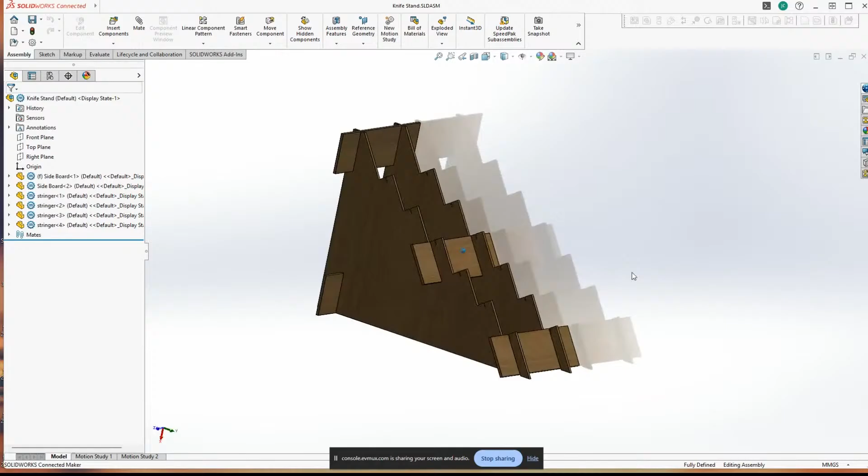So I think today what we're going to do is go over the knife stand, and I finished it up, at least this iteration of it. So I'm going to kind of go backwards through it, and this is the final version. Well, at least the final iteration of this. We may make changes. I'm going to have some made up and tested, and see what changes may need to be made or improvements.

But basically, it's just 3 millimeter basswood cut from a 12 by 12 sheet, all cut on a laser, so that when they are offered for sale, she'll offer engraving service. Also, there will be a base price for the stand. I'm not sure about the colors. I know that there are different colors. I don't know if she stains them or if they come in the wood, if she purchases it in different colors. But there will be a price for the stand, then there will be a price for each engraving

that you want. So if you wanted like the top, which is completely visible, even if all 6 knives were on here, the bottom front, you could do a logo there. And this is pretty tall, so a knife wouldn't cover up most of this, so you could have that engraved. This would be partially covered up if you had a knife on here. But either way, you could have them all engraved if you wanted, but it'll be a little extra for each engraving. You could have the sides engraved, I'm assuming.

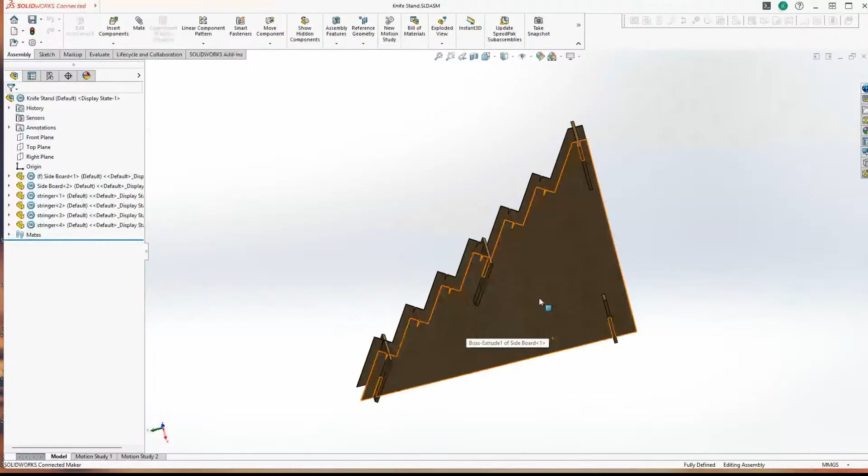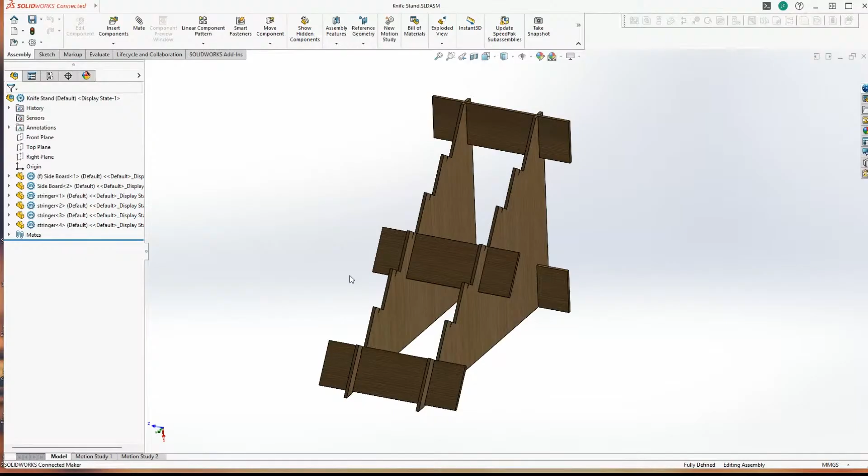But when you didn't have knives on it, everything would be visible. So if you were like displaying this at a flea market or a knife show or something, and you were selling the knives, it might empty up and expose places where you might want to have a logo. Anyway, that's up to you and the person who will be making and selling these.

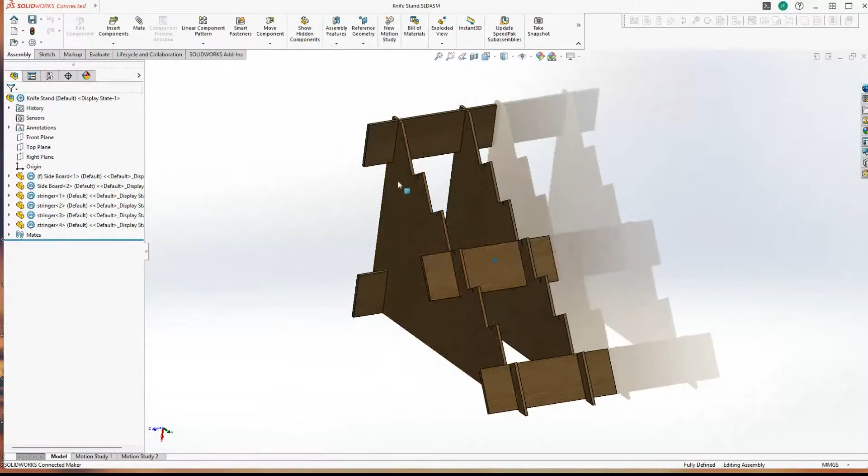Anyway, I wanted to go through a couple issues, or at least design strategy that I had when designing this. And I started with this side piece knowing that I wanted a step design that knives could lay on. I mean, we've all seen the 3D printed versions of this, which are nice, and most of them are more sturdy. This one is bigger than most of the ones I've seen, and it'll lay flat. It'll probably ship in a padded envelope, I'm assuming, or a thin box. Won't weigh much, and the cost will be pretty reasonable.

Let me open up the... This is where I started, and while designing it, I wanted to keep in mind. I knew I wanted to cut this out of a piece of 12 by 12, so I knew that I wanted this piece and the other side, the left hand and right hand sides, to fit together. So I had to make this length the same as this length, so they could be nested together, and that could be like one rectangle to cut that out.

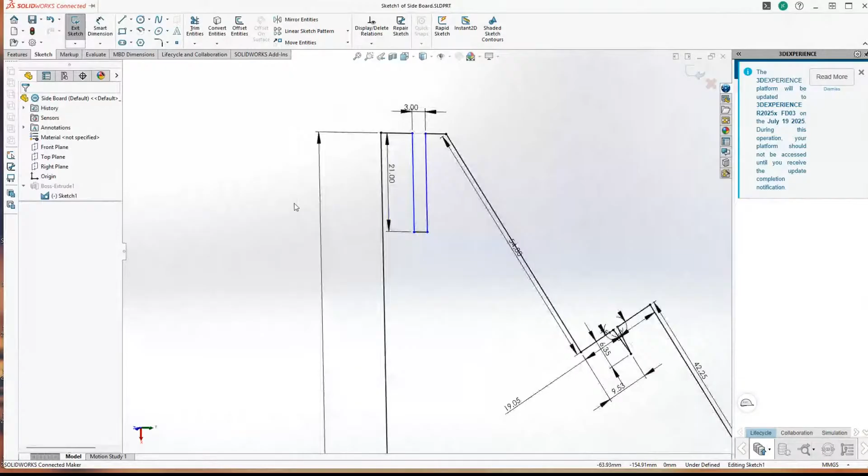These lengths changed because every little tweak you make changed. I put 6 shelves on here, so I had to tweak these a lot while I was going. So I had an idea, I sketched it up, then I just started tweaking. This is blue because it's not constrained, so I could move this, and we don't want that. So what we would want to do is add a dimension here just to lock this in so it wouldn't move. And now you see that it's all black, it's not blue. So this should be fully constrained or close to it. Yeah, I think everything, there's no more blue, so it's fully constrained.

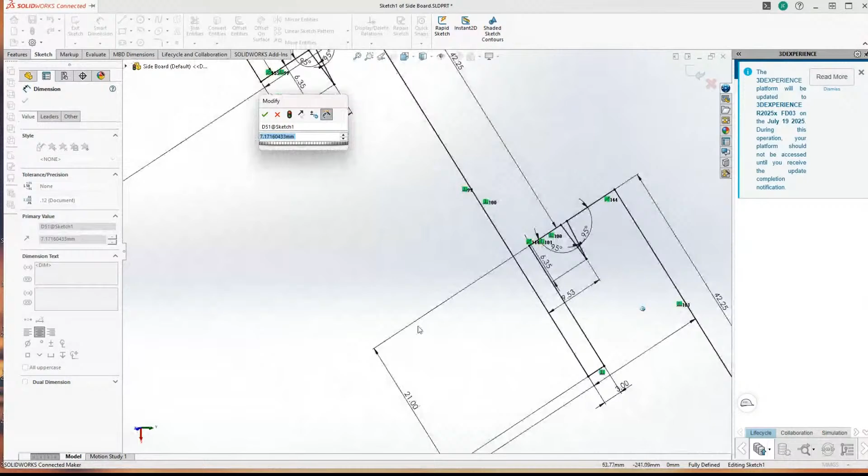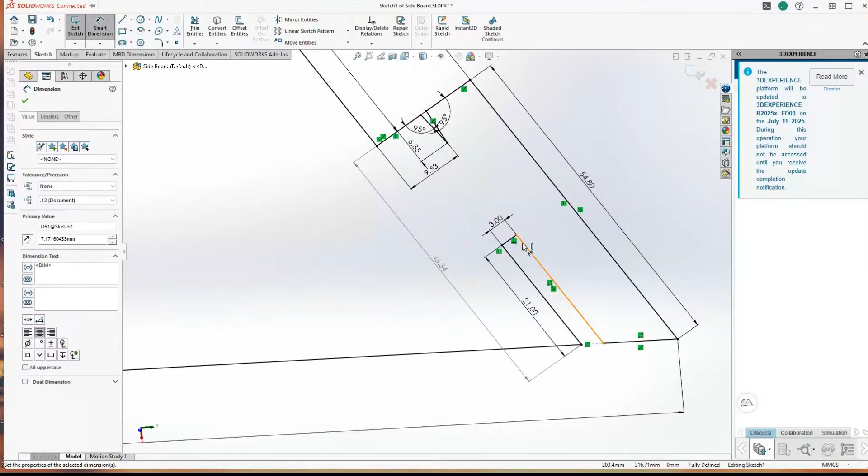Now, the methods that you use for constraining things all vary a little bit. So my primary job function was not creating mechanical parts, so there may be things that I'm not doing the way someone more experienced with mechanical assemblies and parts would do it. But this is what I got. So I knew that these had to be 3 millimeters because the material is 3 millimeters thick. And this could be adjusted slightly, you know, if the material wasn't consistent, you might want to make this a little tighter or a little looser based on how the material comes in.

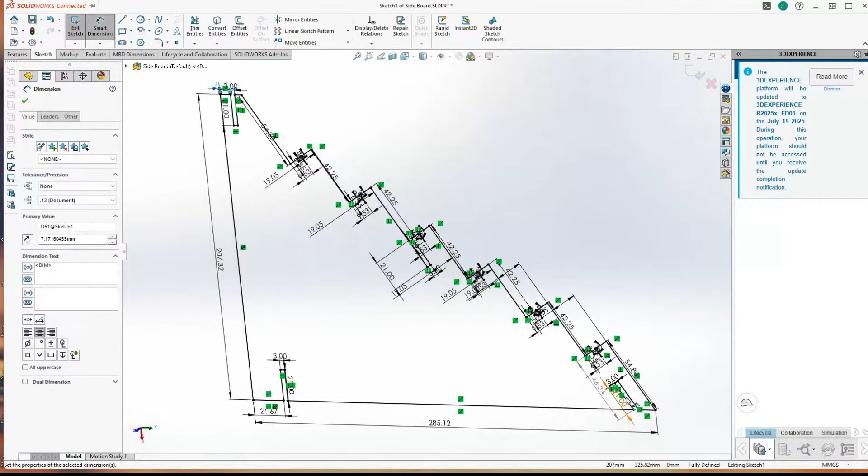But originally I just had a brace on top, on bottom, and the front. And the person that's making these for me suggested adding a brace in the center. I decided to put it on this same angle just so it looks, I think, if you put a logo on there or something, it would look better. So anyway, once that was done,

and I put them together, started tweaking, I made the side braces. I originally made these 6 inches long, knowing that out of that other pattern, you could get 2 of them cut on one board. Originally, though, let me show you the flat pattern that I created.

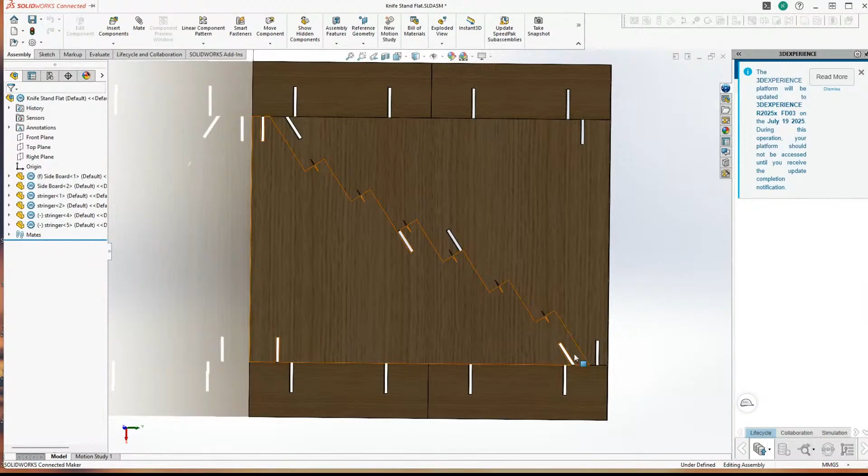And the way this was created, I had to rebuild that. I think it's because I added that dimension up here, so it wasn't locked in. Now it's locked in. So anyway, after I created all the parts, I just created this assembly by bringing in each part. So I brought 2 of these sides in, and then you use the move or the mate to mate them together. And actually, I guess we could walk through that process. Let me start a new one.

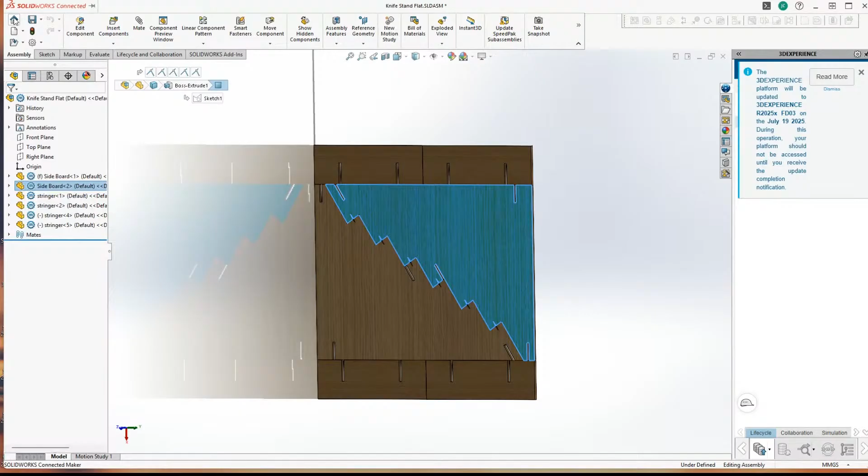New assembly. You want to insert component. Let's do a sideboard. Hit the check mark. That's inserted. Let's insert another one. Another sideboard. Oh, I don't know if that brought it in. Oh yeah, they're both here. So then you'll want to select one and rotate it.

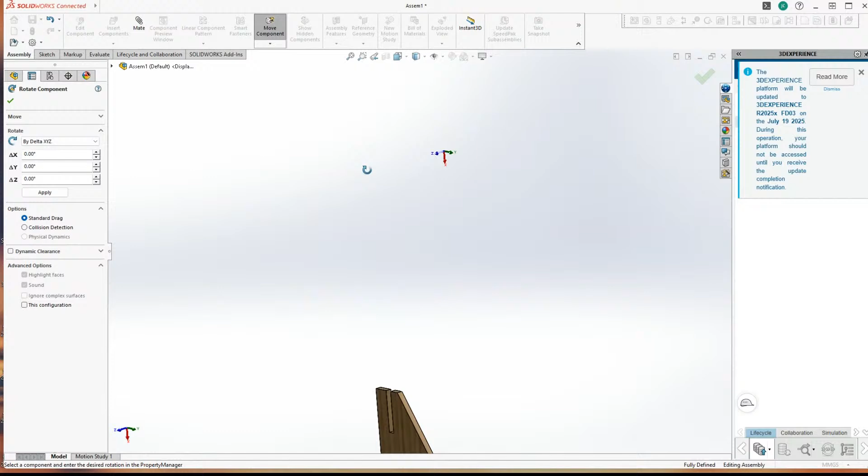And instead of a free drag, I'll do a rotation around an axis. And the Z axis is the one that I want to rotate on. And so I'll go over here and rotate it 180 degrees on the Z axis. Apply that. I didn't select the component. Selected component is fixed. I think the first one I brought in was fixed, so clear selections.

There are ways to select it. Oh, I should have selected it from the tree. So let's try this again. Move component, rotate about the Z 180. That didn't work. Let me select the second one. I think the first one is fixed. Move component, rotate. About Z, 180. Apply. Well, now it's asking me to select it.

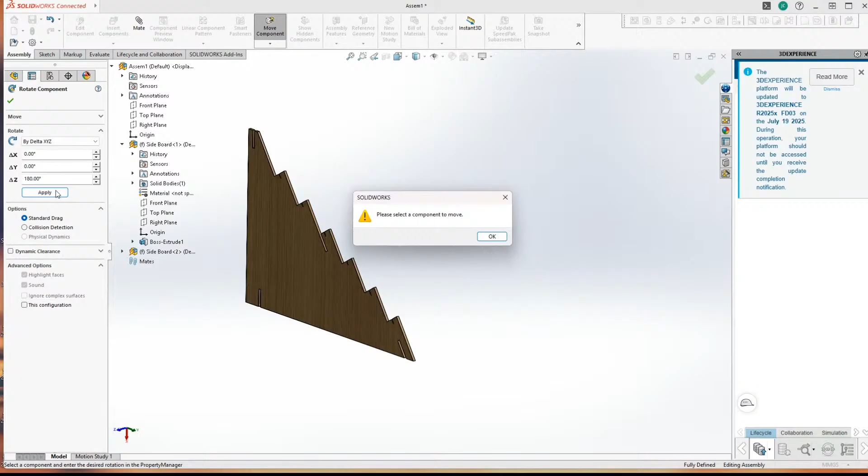I'm going backward through the design to show a couple of the ways I did it, if I can figure it out. It's saying that it's fixed, but I'm not sure why. What I'm trying to do right now is rotate. Select component is fixed. There should be two here, so I'm not sure how you select one of the two. That's not selecting it.

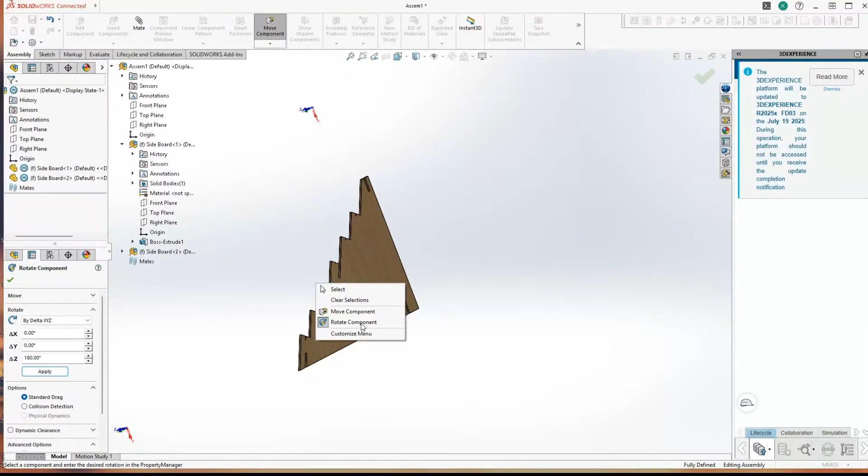Select a component and enter the desired. But it's not letting me select it. I have two of them stacked up. That's the problem. Let me try this again. Let's back up.

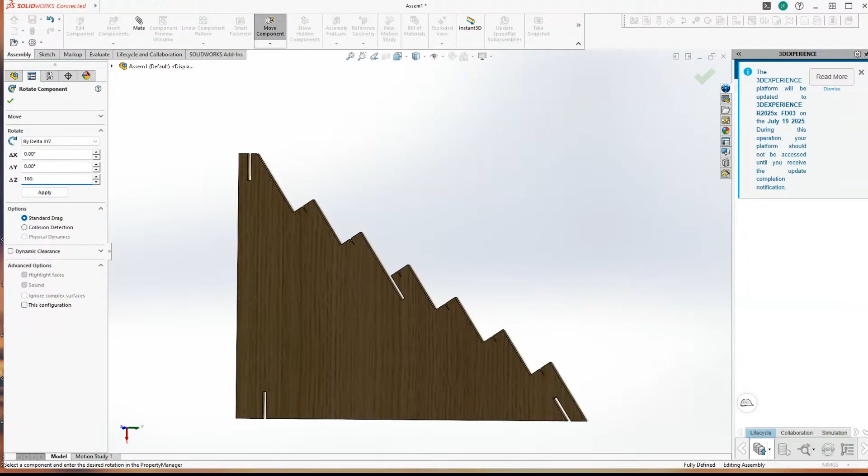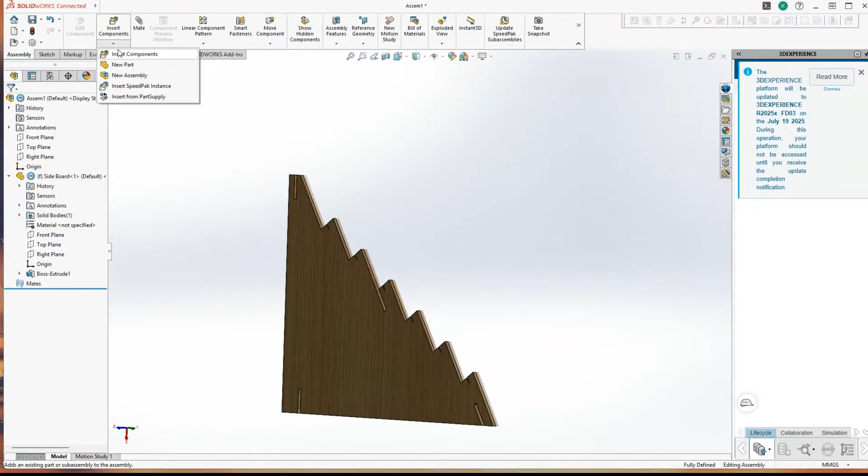There. Now I only have one in here, so I'm going to just rotate it before I bring the other one in, since I don't know how to change this selection. Something I have to look up. Why is it not letting me select it? Let's exit out of this. Maybe it'll let me insert a component. Sideboard.

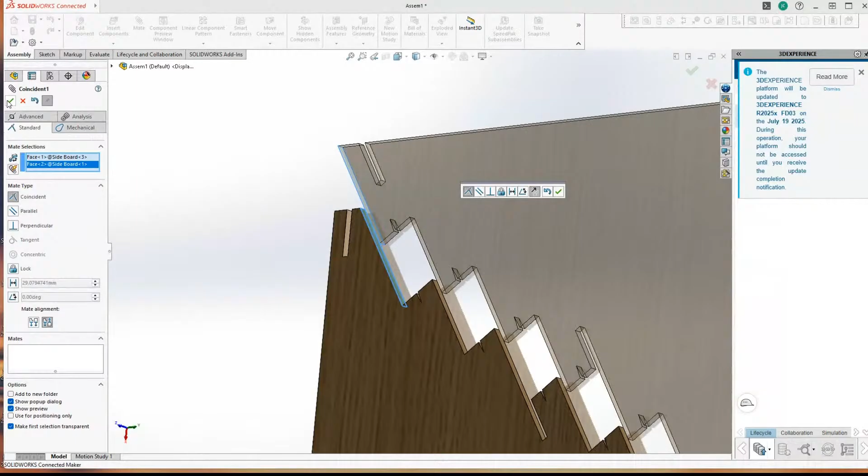So there. Now we'll rotate this component 180 degrees along the Y-axis. Apply, check mark. Now we want to use the mate function, and I want to mate this face with this face. Hit the check mark, completes that. Then I want to mate this face parallel to this face. Hit the check mark to complete that function. Now I can do that face to this face. I'm done with those.

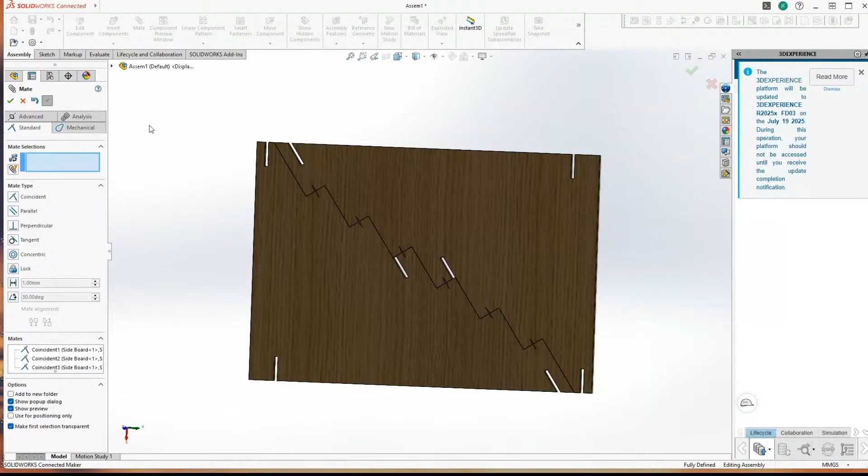So now a drawing can be created from this to cut this out if this were the only part we were using. But we want to bring the side boards in also, insert component, or I mean the stringers. And you can move around. If you're looking like this, the part moves on the same plane it is, but just in this direction.

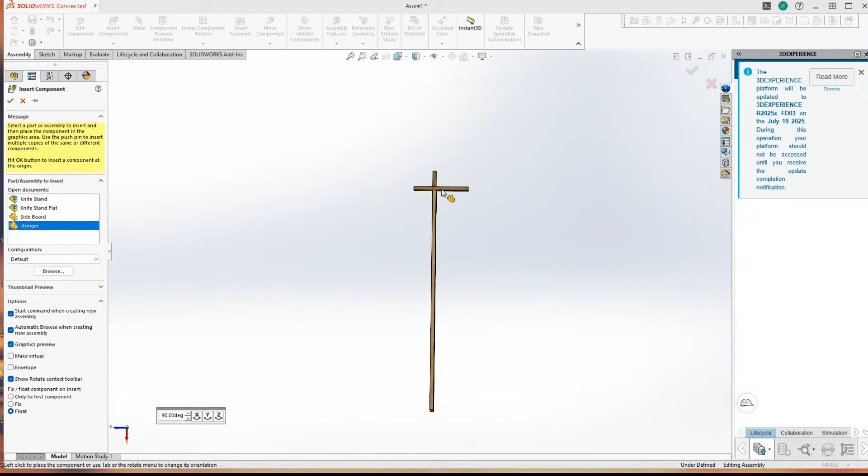But then you can change the view. It'll stay locked in there, and you can move it this way. It's kind of neat. But since we're moving it around, we'll do the same thing and rotate this part 90 degrees on the y-axis.

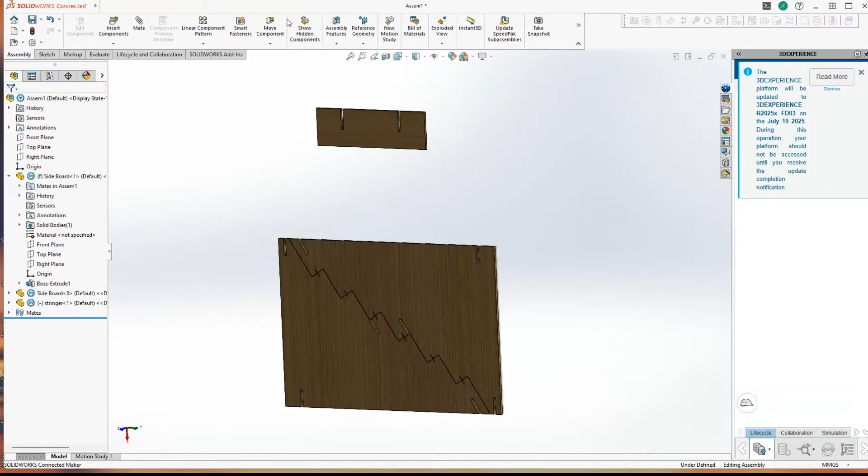Apply that. So this one's facing up, so we'll put that on the bottom. So this is 12 inches, and this is 9 or 8 something. I forget the dimensions exactly. But we'll finish that. Now we can move this closer to where we want it just to make it easier. Finish that, and we can do the mate component.

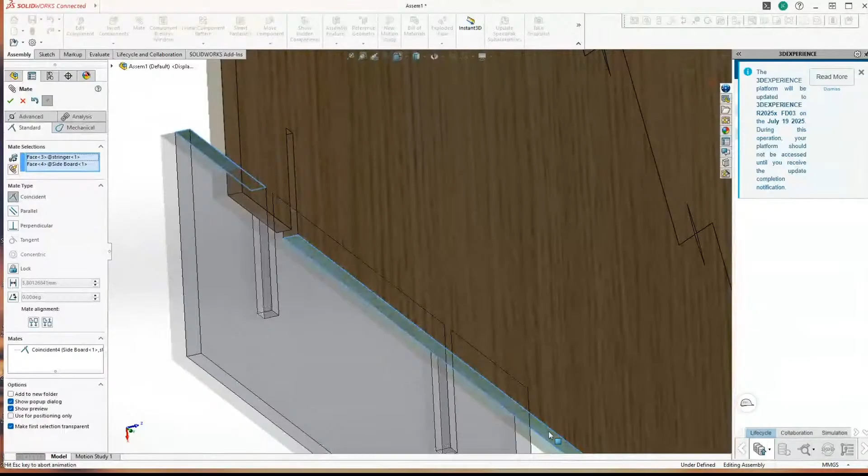We want to mate this surface with this surface. Complete that. Mate this surface with this surface. Complete that. And then this surface. And the first one you select is the one that moves. I think this one was fixed, so if I do this, it'll probably move. These are now mated together, so these will move together. But you want to select the one that you want to move first and finish.

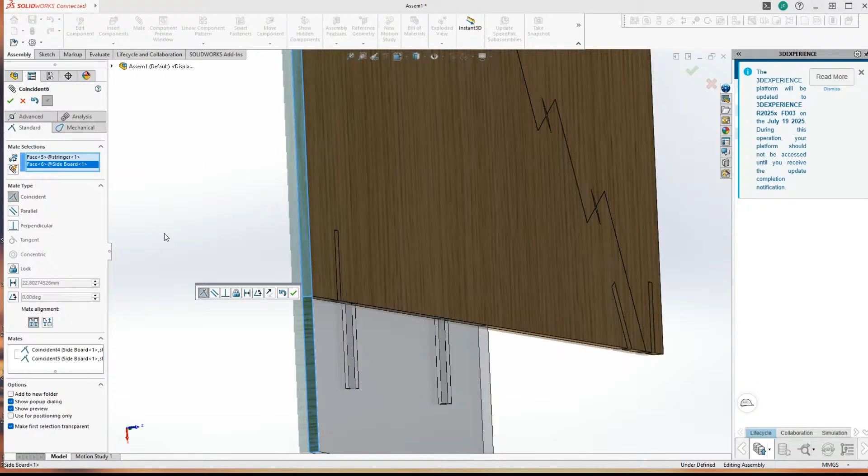So now I have that, and I put it this way because the laser is going to come down here, and it just keeps all the laser path together. You don't want to have the laser cut the outside, because then you're cutting into whatever your backer material is on your laser cutter. And it usually doesn't hurt. It's usually just scrap plywood or a honeycomb stand. But this just makes more sense.

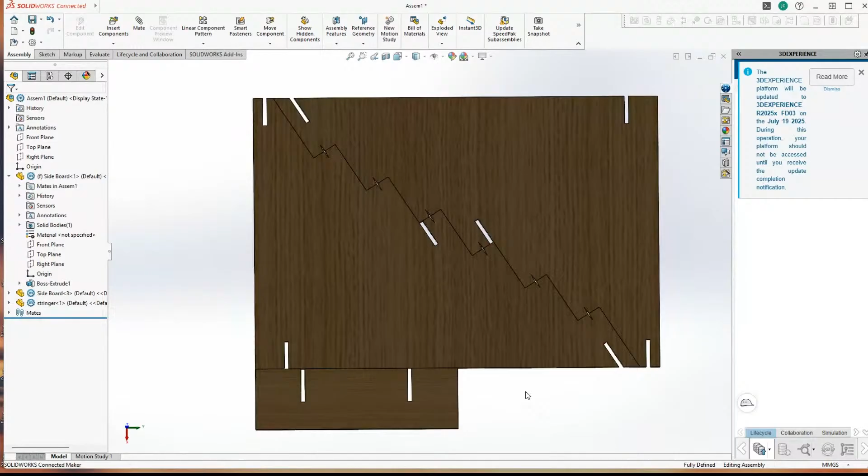And if I really, really wanted to get into it, I could put this slot and this slot together so that it just makes one rectangular cut. But as simple as this design is, we're not going to get into that just yet.

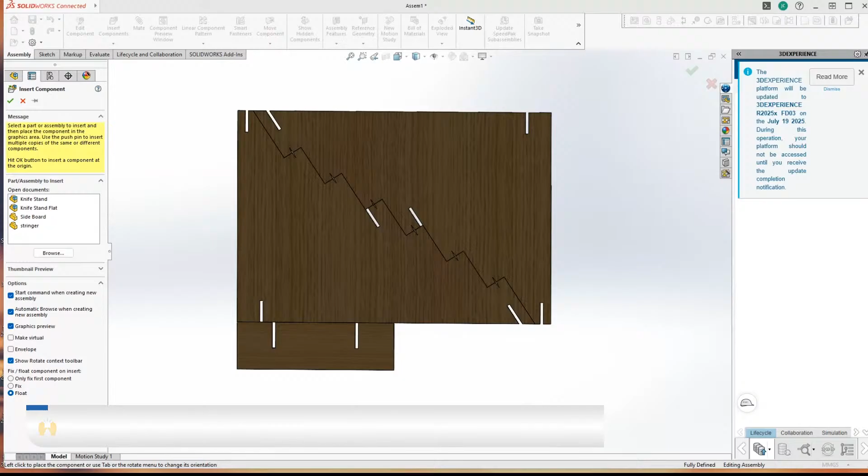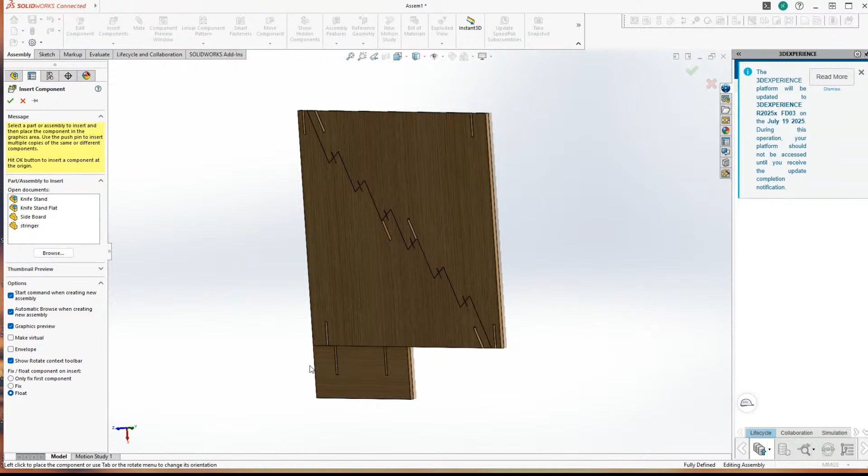And I'm just showing this. I'll go back to the completed stand once I do finish this up. I'm just showing how to create the flat assembly for cutting. Similarly, if this were sheet metal, if this were bent up 90 degrees, you would just do an unbend and make everything flat for cutting out the base piece. Then you'd put this in the brake and make your bends, so forth.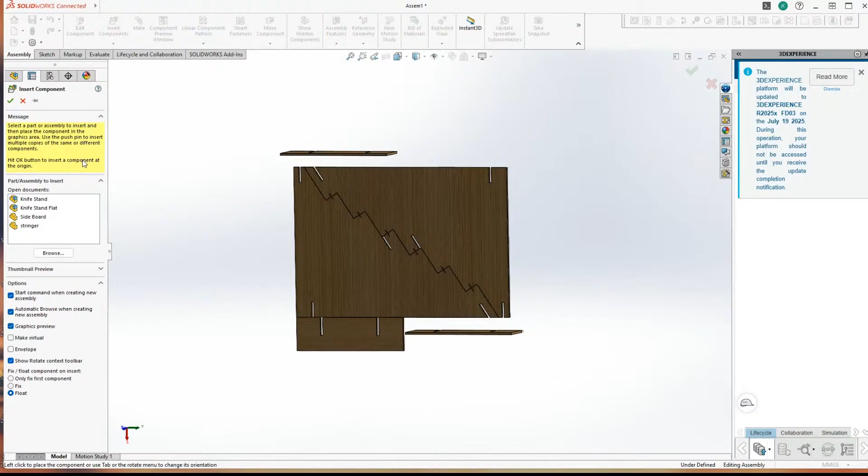But we're back on insert. Bring another stringer in. Put it there. Let's just bring them all in now. And those are all the pieces of the knife stand. When you make a drawing, you could put a format on there and have your item list, bill of material, and you could get into describing them.

This is just a visualization finish. I didn't actually apply material, or I may have, but you can apply materials in such a way that in good software programs, you could get the total weight, estimate the mass and everything once you're all done.

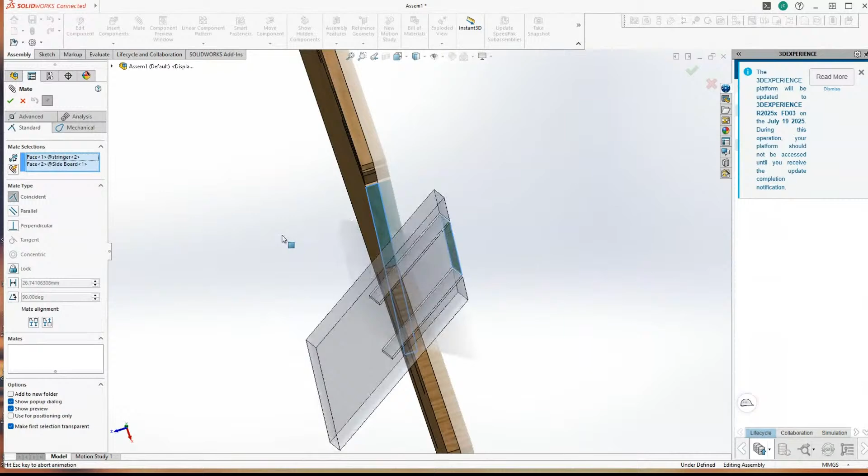So let's go back to the mate. Instead of rotating this first, I'm just going to try mate and see what we get. I'm going to mate that surface with this surface. Yeah, see, that rotates it. Hit the check mark to finish that. Mate this surface with this surface. It's not really mating the surfaces, it's mating the plane of the surfaces. We can mate this with this. Finish that. Now we have the bottom complete.

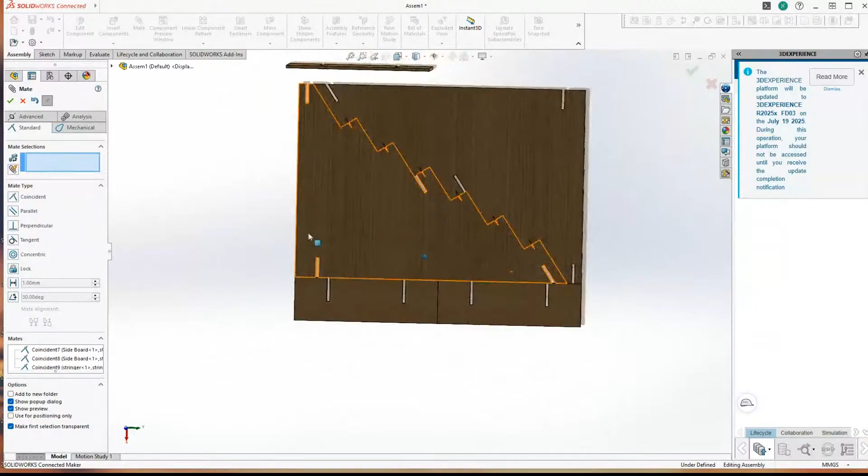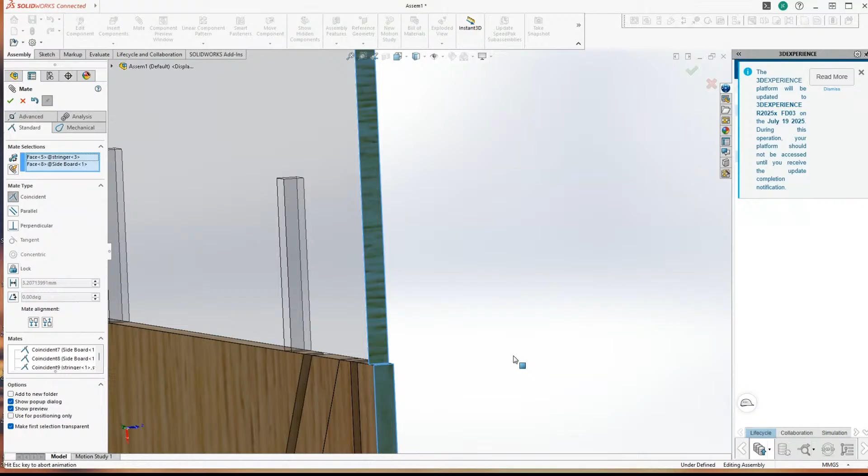This one, I want to mate this surface with this, so that these cutouts are facing along the already necessary cut line. Finish that. Mate this surface with this. That one's done. Now this one, we want to mate this surface here. And I picked the edge, so it just lined up the edges. But we can do this.

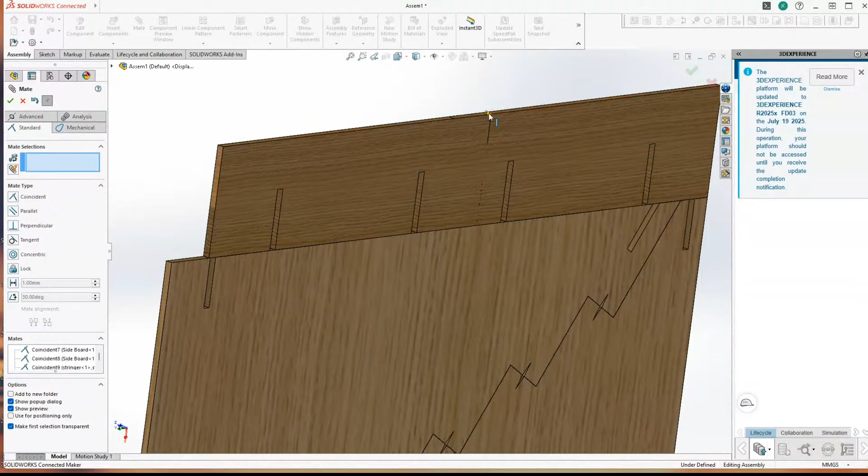And this is kind of hidden, so there's ways to select hidden edges, but instead I'll just do the easy way. Pick these surfaces. And since these are all made to exact dimensions, they're mated already. So here you would go and create your drawing, and I'm not going to show that. It's a little bit of a process, but what I will do is, I think it'll let me open up one that I created. Let me finish this. That's how I created the flat pattern.

But let's open up, this is the drawing, and you see it just shows, I didn't build a format for a revision block. Most drawings you'll have your revision block here, Rev A, and you can do number, whatever your revision system you decide to set up. Rev A, you could do a Rev Dash for unreleased, and then at my last company, that's how we did it, or a couple companies ago, and then Rev B for the next revision, and put a description so someone looking at the latest drawing knows what changes were made.

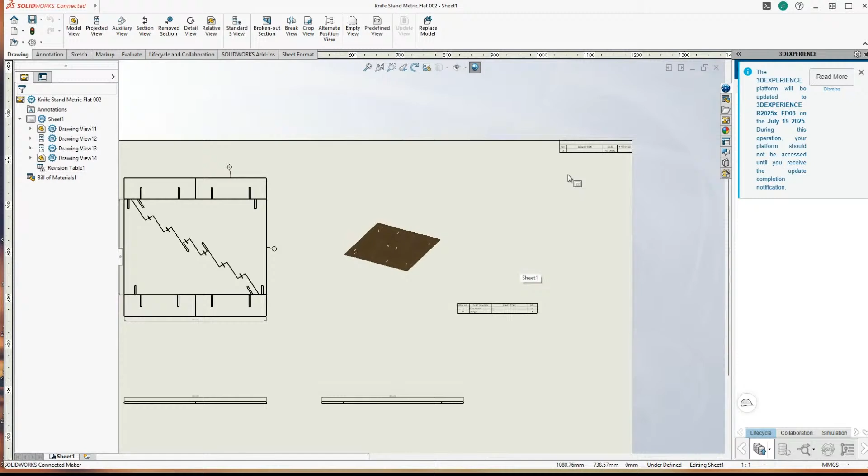But this is item 1, the sideboard, and it shows you that you have a quantity of 2. Item 2 is the stringer or brace, whatever you want to call it, and the quantity of 4.

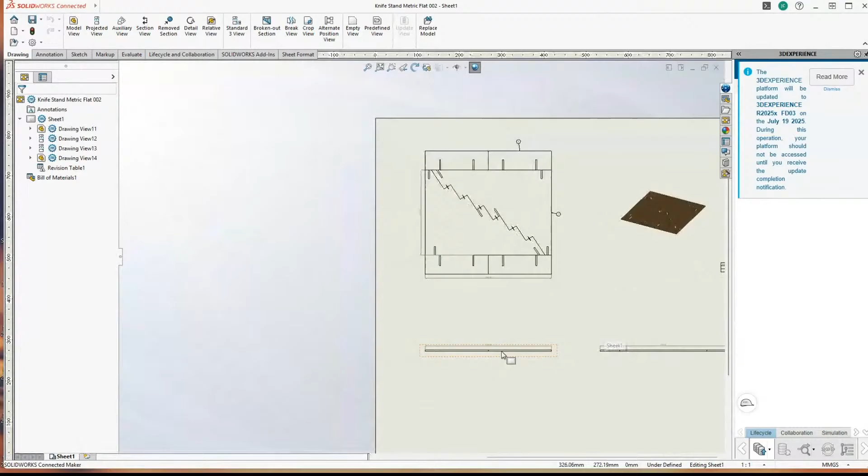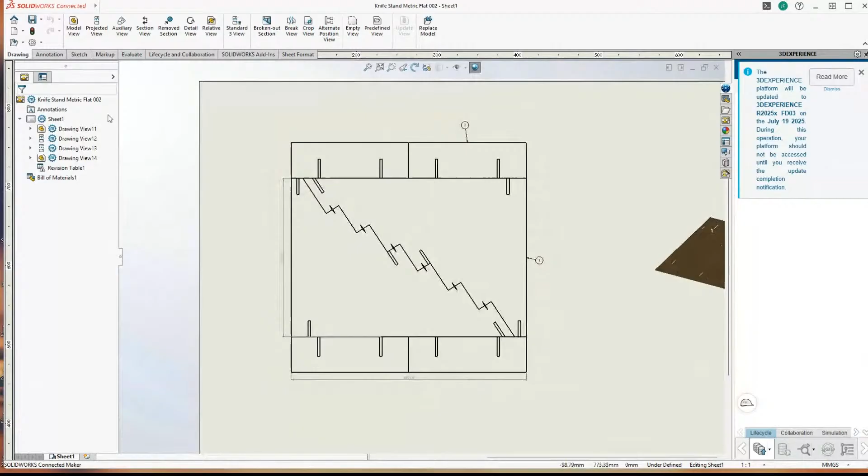Now this, you could DXF this, you can create this drawing. I haven't figured out exactly what format is best for the laser cutter. I haven't set my laser cutter up yet, and I didn't really get into detail with the person I had do this, but she was able to do it from, I created a separate drawing that's just the DXF of just the flat pattern, and she was able to use it. I don't know if she had to convert it to vectors. Should have already been vectors.

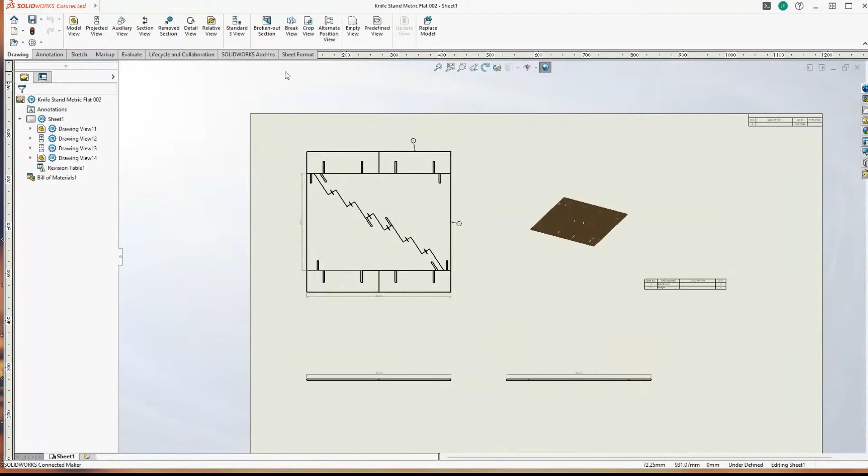This is what I sent her. Or this is actually a SolidWorks version of it, but I sent her the basic drawing of the flat pattern, and the laser just goes and cuts along all these lines. And we'll go back to, let's just close these. A few things I need to look up, but I guess I'll just open it again. So that was the finished product.

Let me, hang on 1 second. Sorry about that. I had to take a drink of water and cough.

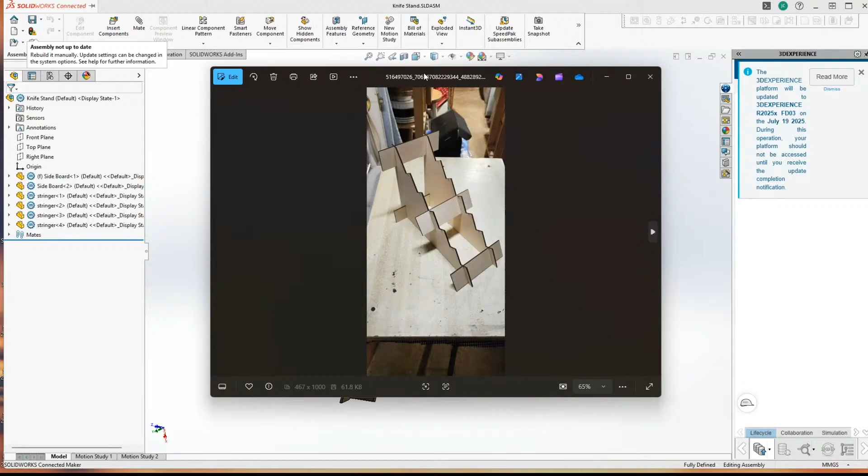But I should have some photographs of the finished product. Nice. Knife stand. This is what it looks like cut out and slapped on a table. It's a little tall. I wanted bigger because, like I said, I won a 3D printed one from someone, and most of my knives won't actually fit on it very well because it has little humps to keep them from falling out.

I didn't do that on this design just because it's at such an angle that you could shake this table pretty hard and things aren't going to just fall off of there. I don't know if that's something people would want or not, if they would want a little U shape to hold knives in there, but these are really long shelves. Most pocket knives will just fit in a little corner up here and it'll be pretty sturdy.

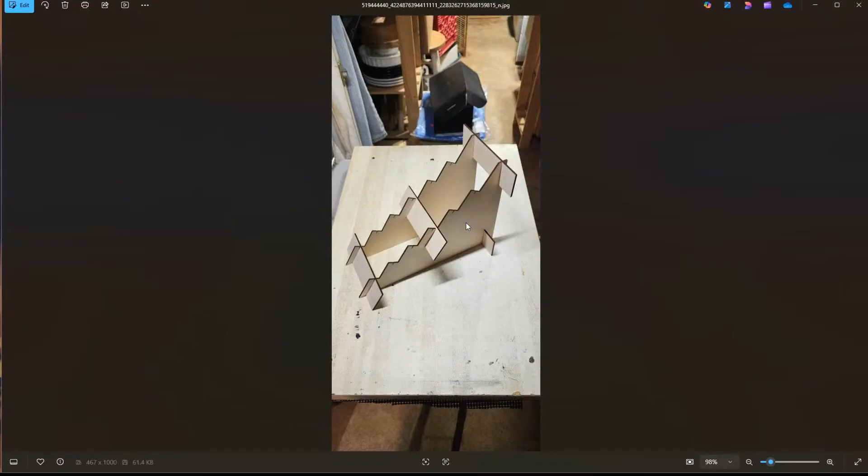But the price is going to be pretty reasonable. And like I said, I believe she can ship them in a flat padded envelope, 12 by 12 at the most. I'm not sure. I'm going to have her ship me some prototypes and then we'll see what cost might end up being like.

Here is the stand with some knives on it. And I'm not sure how to show this with, oh, there we go. But there it is with some of her knives.

We're going to have to hook her up with some better knives. Not that these aren't cool. I'm pretty sure she actually throws knives. But she's not necessarily a knife person that I know of. She may be. I have no idea.

But one of the things I want to have evaluated is how these little notches work out for people. It looks like the edge of the knife clearly isn't sitting on anything. So not that you're going to damage it much with basswood, but I don't know if these might need moved in or out because this kind of puts the knife at more of an angle, which may be good actually so that it's more secure on the table. If someone bumps your table, you don't want the knives all just falling off, especially if you're at a show and had nice ones.

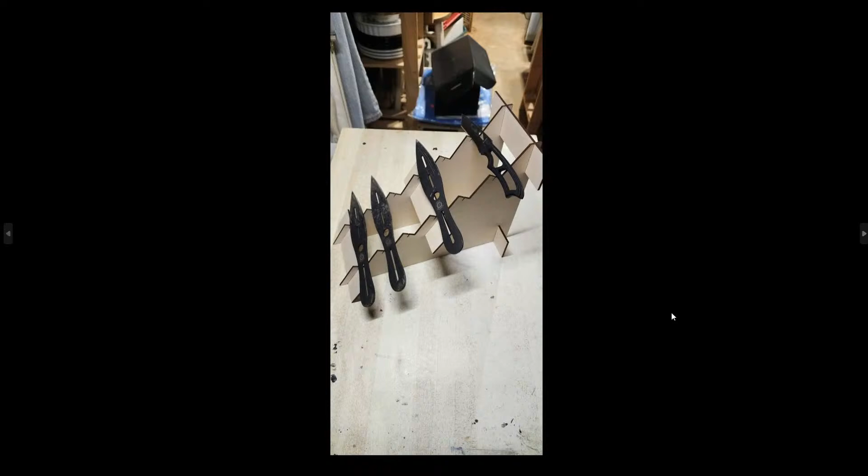But let me see if I get a different angle of that. Yeah, you can see that they're laid back pretty far.

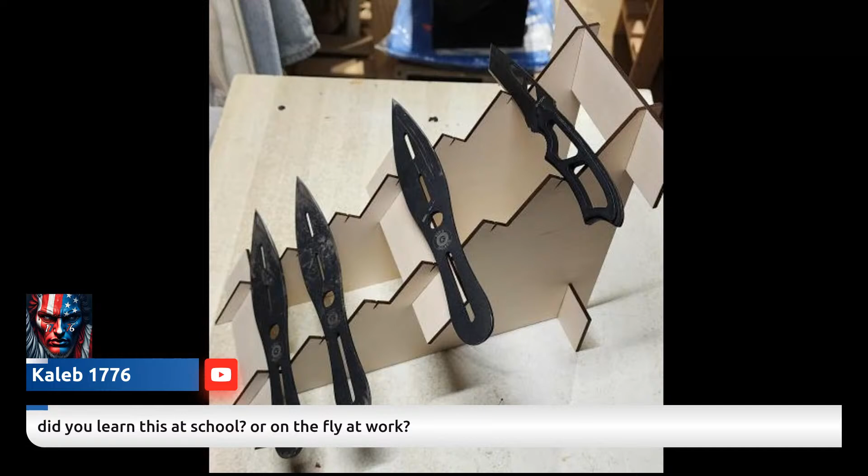I thought I saw a question. Kaleb, is that a question for me? Did I learn this at school or on the fly at work? So, back when I went to school, I learned mostly just 2D drawings. And I actually was probably in one of the last classes in my school to do manual drafting classes. So the basic engineering principles, design principles, I did learn at school.

This software, actually, I just got this software, so I'm learning it now. But basically, I went to school for a little while. I didn't get a degree because it cost too much to go to school and work full time. It was just a little rough on me.

So I went and got a contract job at General Motors, Packard Electric, and I did 2D wiring harness drawings for pretty low wages, $7.25 an hour, which was pretty low, even in 1995 or something like that. Yeah, I think it was 95 because we designed the 99, the new style GM truck, the harnesses for it.

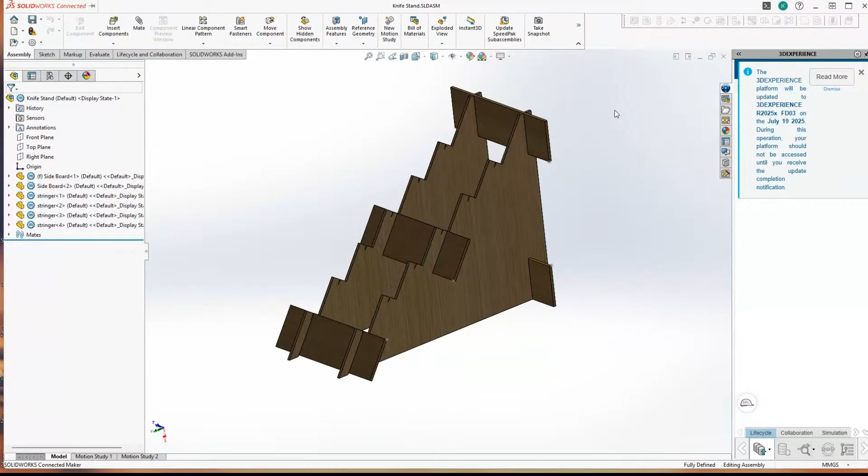How's it going, Robin Down? Hey, Baptism. Robin's up in Seattle, the home of Boeing. I'm in Portland right now, and I just applied for another job at Boeing because I am unemployed at the moment. So if I get that, it'll be up in Everett. And I don't know why I wouldn't get it because I have all the experience they need.

But you never know. The economy is a little bad. There's a lot of people out there, so the only problem with not having a degree and being in this field is that, why not hire the guys that have degrees? I can't blame the company for that.

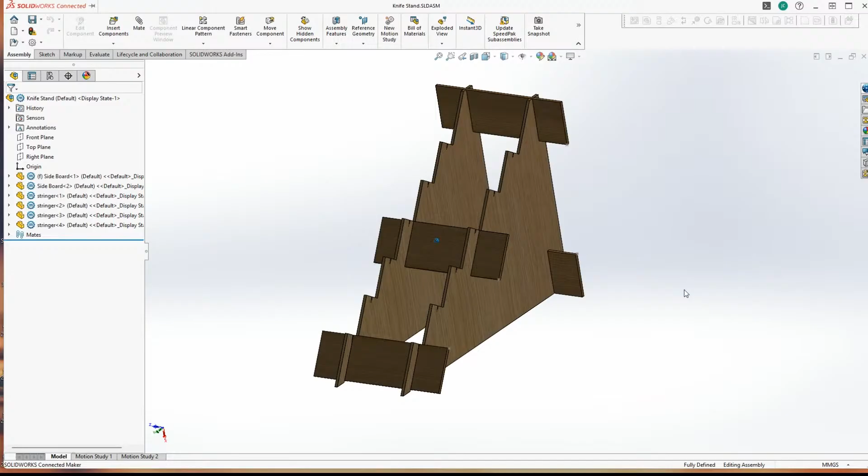Although my last company, I had it pretty good just because the person that hired me was someone that I worked with at different jobs, and he knew my skills. And my last position was actually as a design engineer, even though I don't have a degree, just based on my experience. I mean, I have 30 some years experience by now.

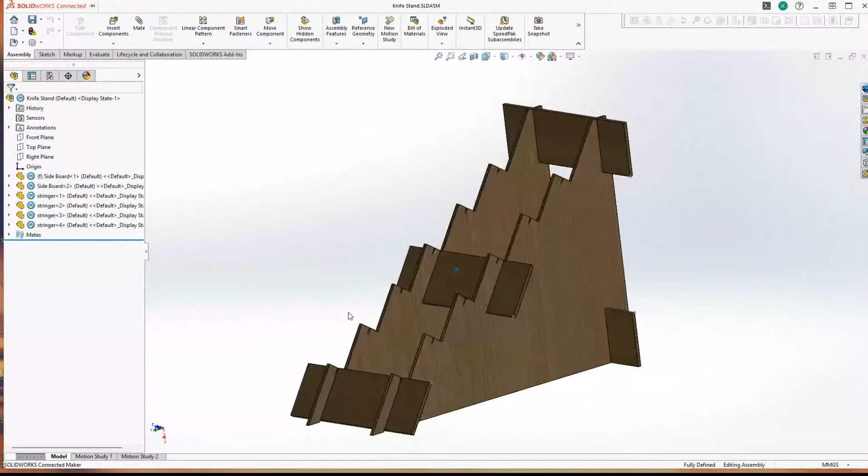I started in 1990. I actually first started, even before I went to school, doing 2D drawings in AutoCAD working for my dad. So my dad was a design engineer, and he was a workaholic. He definitely has a lot better work ethic than I do. But at one point, he had 3 full-time jobs, and he would go in on Mondays to one job, get all the work for the week.

The rest of the week, he would work at the other job, and the third job, they just sent him stacks of work, and he would do markups, and I would just do the drawings, crank them out on AutoCAD and MicroStation. So he was making like 30, $40 an hour for all of these jobs, and I was making $5 an hour, which is fine with me because he gave me a place to stay and food, and $5 an hour untaxed. It's good enough for me at that time. I only needed beer money.

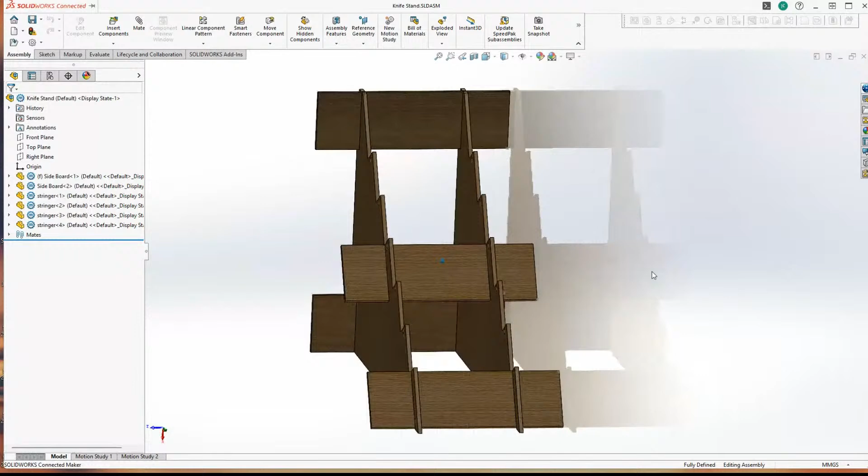Paine Field. No, I won't be at Paine Field, but close. Actually, I don't know where they'll be doing the project. It'll probably be in the main factory or one of the towers up there, one of the engineering buildings, or I don't know. I haven't been there in a while, so I'm not sure. I think for some projects they were doing out in Mukilteo at some buildings they had there, and I don't know what buildings they still own or use. But hopefully I'll hear from them soon. If not, I'll figure something else out. I should be able to go to Gulfstream and work.

Let's open up the knife just for the fun of it. I don't know. This looks like the last one. I haven't done anything more on this other than that assembly. I created that one side scale. I'm half tempted to actually make this an actual thing and have someone water jet this out and try to find someone that I could commission, put some bevels on it, heat treat it, and stuff like that. Actually make a real knife out of it, just for the fun of it.

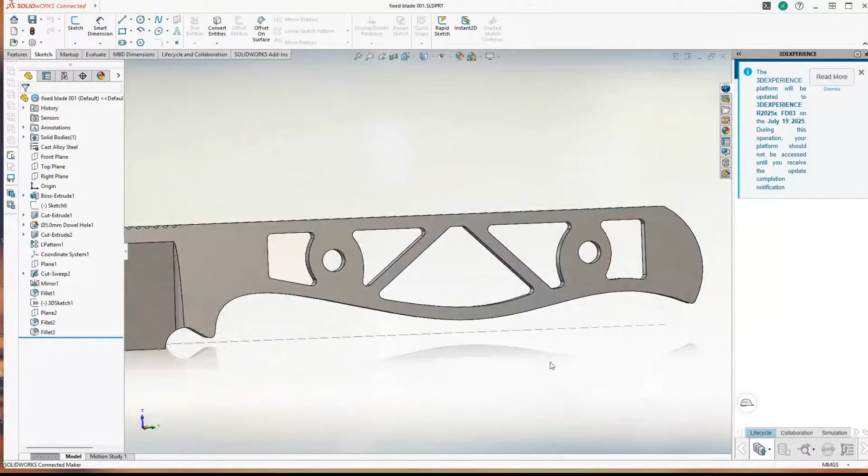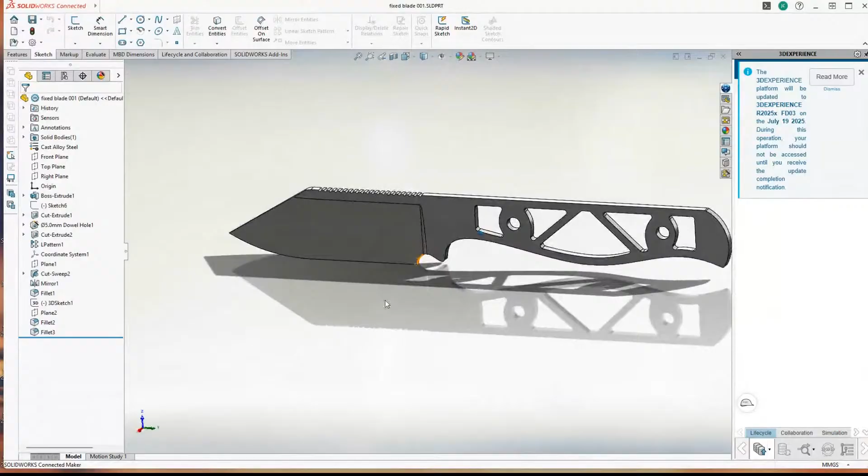No intention to market this or anything like that. But it would be cool just to have something you design made into a product. Am I right? Plus, I kind of like this. Like I said, I made a full length handle for an extra large hand to fit on here nicely, and a nice short blade just because I want it to be utilitarian. So, you know, big giant blades are great too, but sometimes you just want to do some more precision work on things.

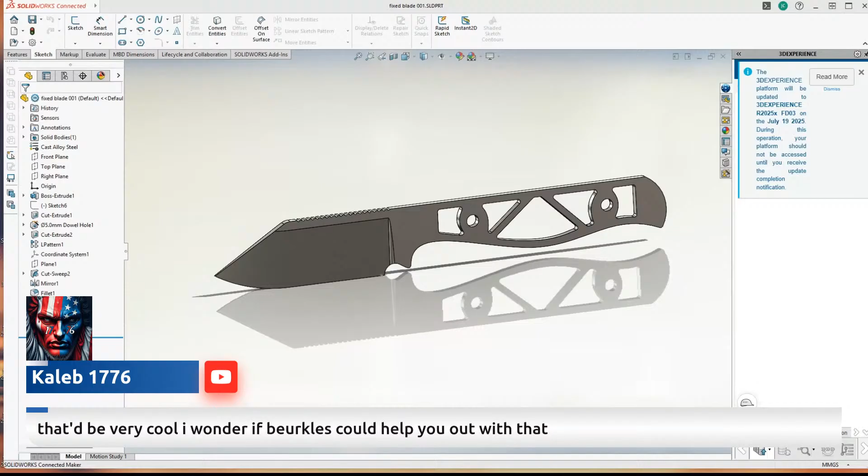Yeah, I'm sure I could find someone that would be willing to do it. I mean, or buy a grinder, you know what I'm saying? So if I send this to a company and have the basic shape cut out, then all that needs done is finishing up the edges, putting a bevel on it, which will be the hard part. I'd probably find someone that makes the little angle stands for putting the blade on and grinding at the exact angle. Might just invest in that. If I go ahead and invest in a grinder, I would invest in one of those also.

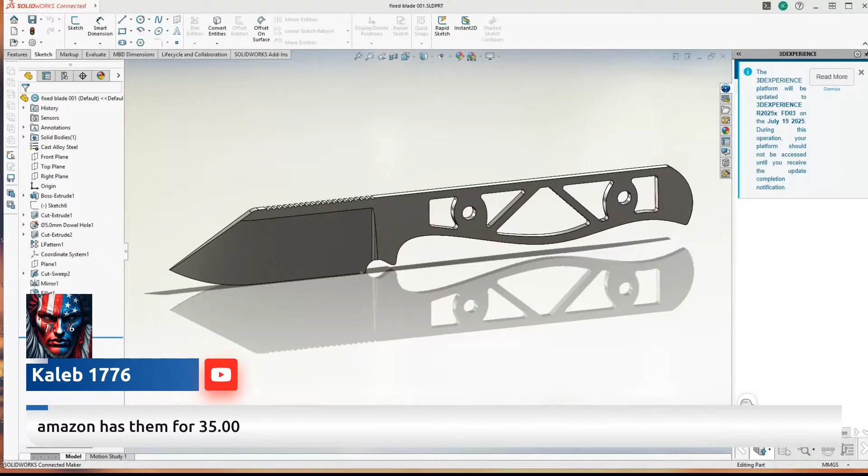And this jimping I made, I don't have to necessarily follow this. Well, I guess I could have this water jetted out, and then you just have to soften up the edges a little bit so that you don't want people to get cuts or abrasions. Or I could take this jimping off, and I have a 20 line per inch checkering file that I could just put jimping on using that. Amazon has them for $35. Talking about the jimping file, or are you talking about a grinder, Kaleb?

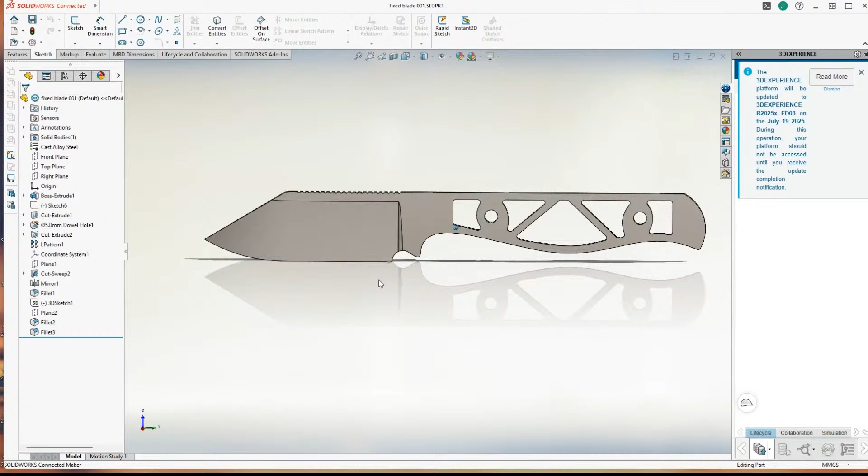Or I could make a drawing out of this, put it on a piece of steel, and use a grinder to cut it out. It would not be this nice. Water jet would definitely be the way to go. Oh, the grinding jig. Cool. I haven't even looked there.

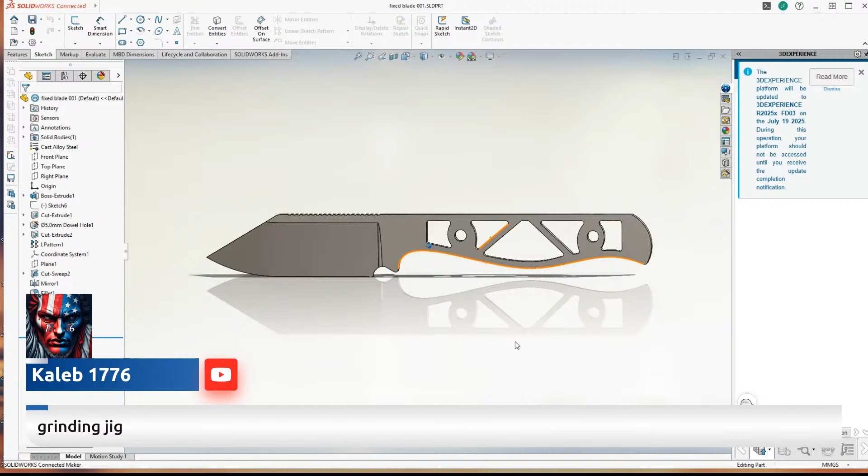I was just thinking, I don't know if you ever watch Walter Sorrells. I know he made some. I don't know if he made any to sell, but he showed how to make one. I don't have a welder. I don't have a drill press, which is probably why I wouldn't even bother. I don't know if I want to buy all this equipment until I know if I'm going to have to move away or not.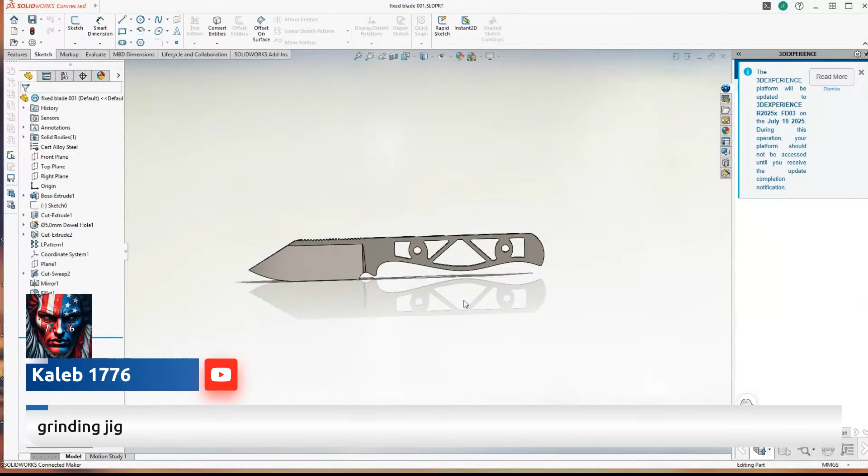But it would be fun. And it would definitely be funner doing it yourself if it comes out okay. It would suck if you do it yourself and it gets really messed up. So maybe I'd have to have like a dozen blanks made and hopefully get one presentable.

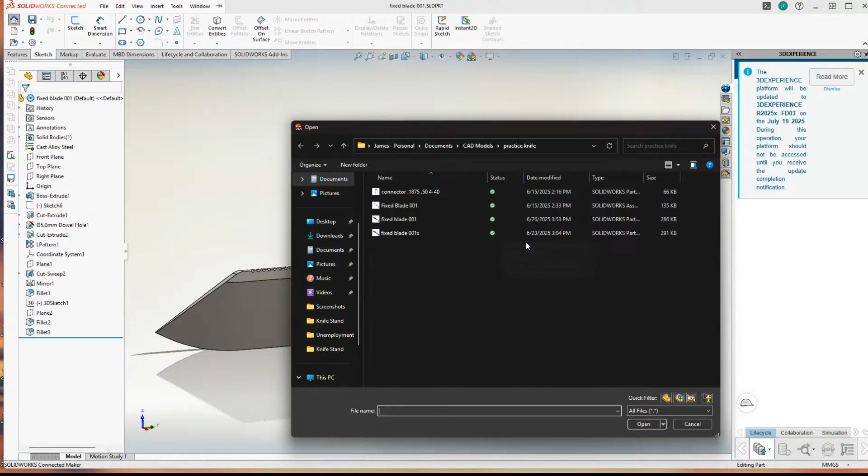But I still need to finish up the scales. I want to revisit. I designed some. Let me open the assembly, if I still have it in here. What am I looking at? I should have named it better. Oh, here's the assembly. I should put assembly in the name.

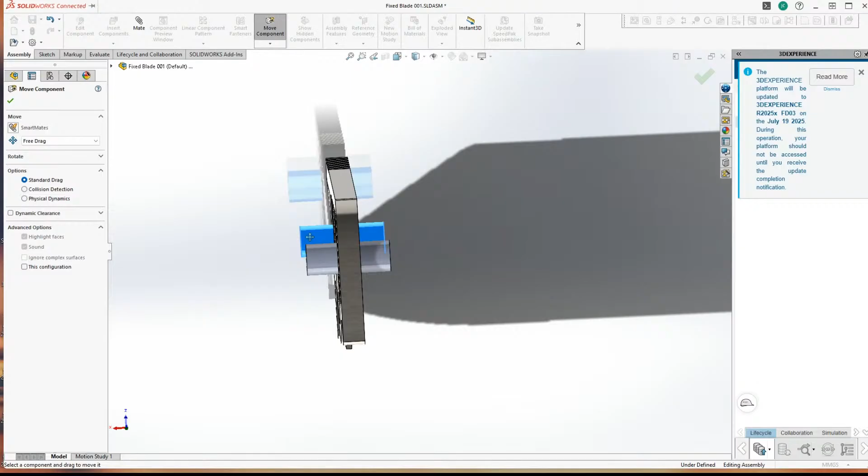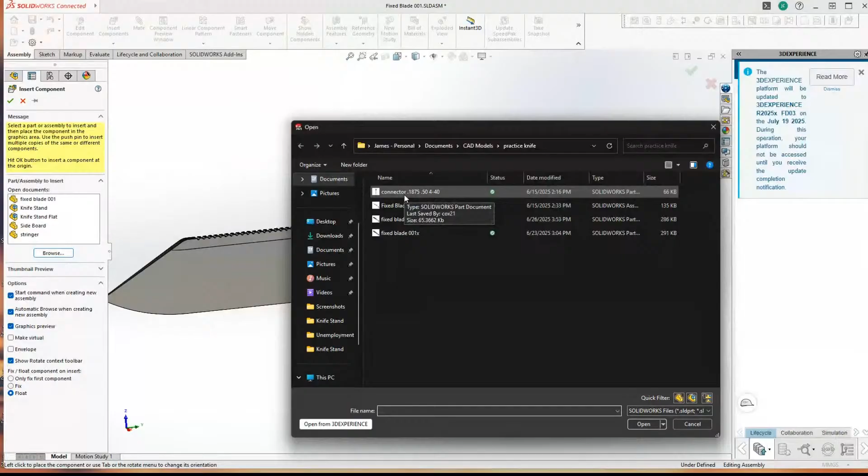Let's rebuild this with the latest version. I created the assembly before I made a bunch of changes. So when you rebuild it, it just brings in the parts that you changed. Like these. I need to constrain these to be exactly centered, but for now I just did that. Oh, I must not have saved the scale. Oh well. Or did I? Let's try to insert component. Connectors are those little connectors. Yeah, I didn't save the scale. So if I do that, I'll have to restart.

But I modeled these after existing parts that you can just go buy. I don't want anything that needs to be custom made where possible. And I'd also need to look at, I put clearance holes in here, so I might want tight holes so that these actually need to be pressed in. I have to look at all of that. Those are things I haven't really thought about. I'd want to talk to a knife maker about that and see what the best method is. But there are screws that fit these.

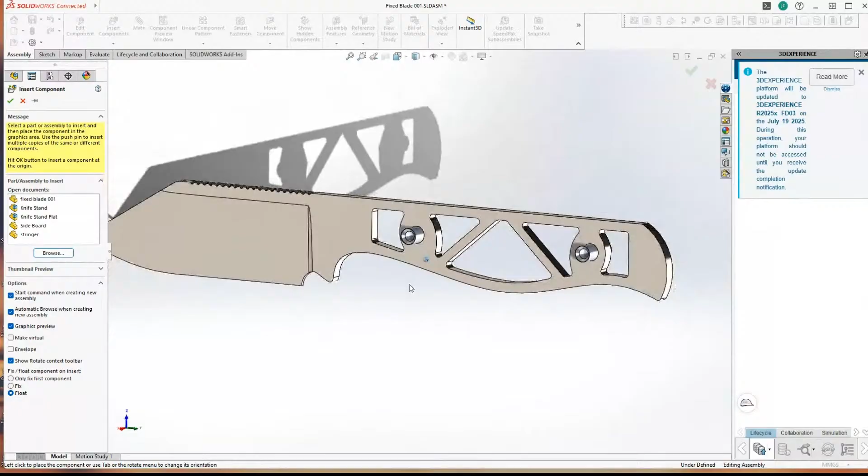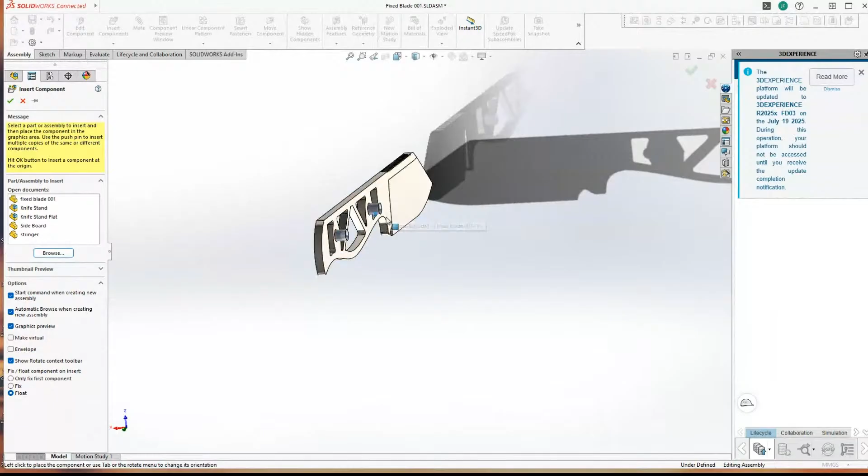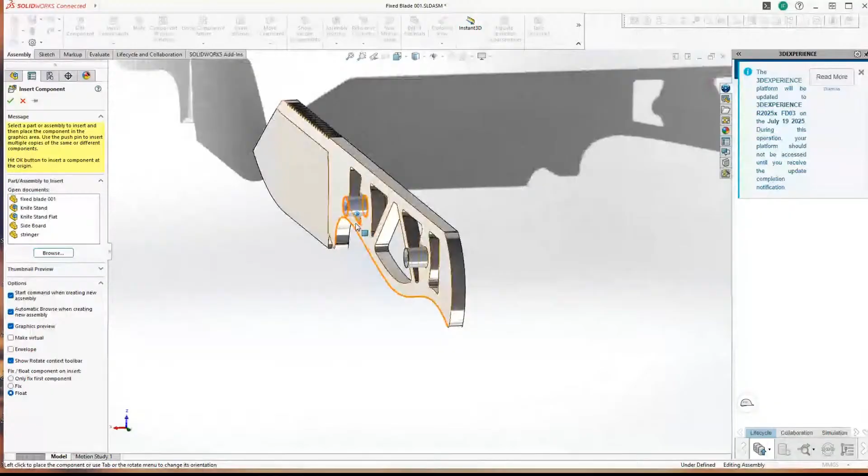I want it to look decent. I may not define the scales, and if I have a maker do it, they can just grind the scales to fit, per their taste and how it ends up being ground. It's not like I would have them molded or machined by mill or anything. I'd just pay someone. These might be too big. I need to talk to someone about all that, help me pick out the hardware.

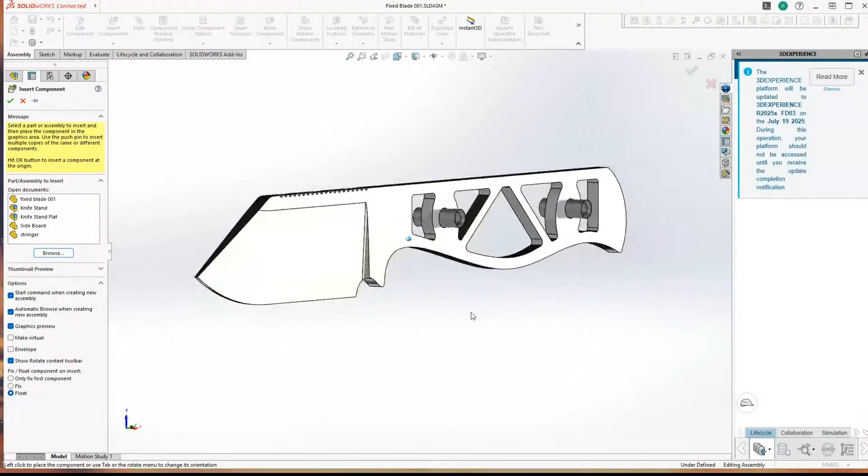Caleb has made 5 knives and 2 came out okay. Have you shown them on your live streams, Caleb? If not, you should, even if they didn't come out okay. Marshall wasn't afraid to show his first built knife. Everyone has to start somewhere, right? And I think it's even better when you can pull out something that looks like crap and say, look, this is where I started, and then pull something out that looks pretty nice and say, this is where my talents have evolved.